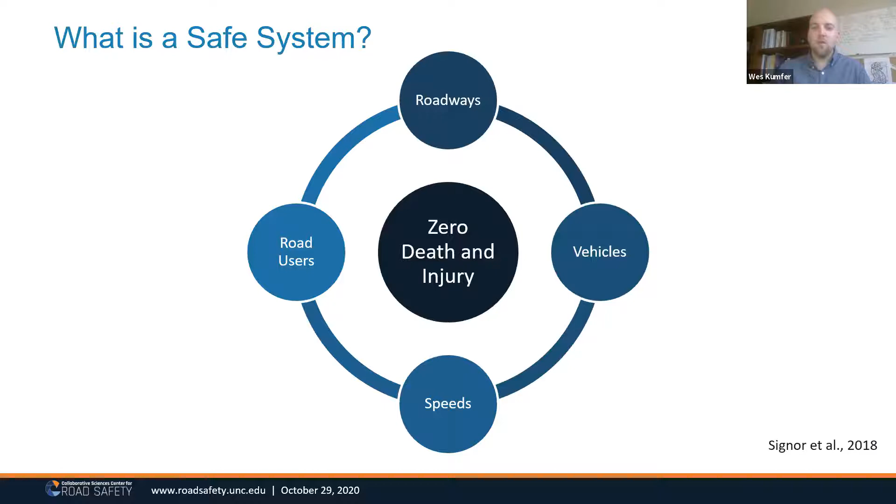As mentioned in the introduction, I am part of the Collaborative Sciences Center for Road Safety, and we are a UTC focusing on safe systems and system science.

Whenever we talk about safe systems, we talk about four key principles: adapting the structure and function of the transportation system to the complexities of human behavior, managing the kinetic energy transferred among road users, treating road user safety as the foundation of all system interventions, and fostering the creation of a shared vision and coordinated action.

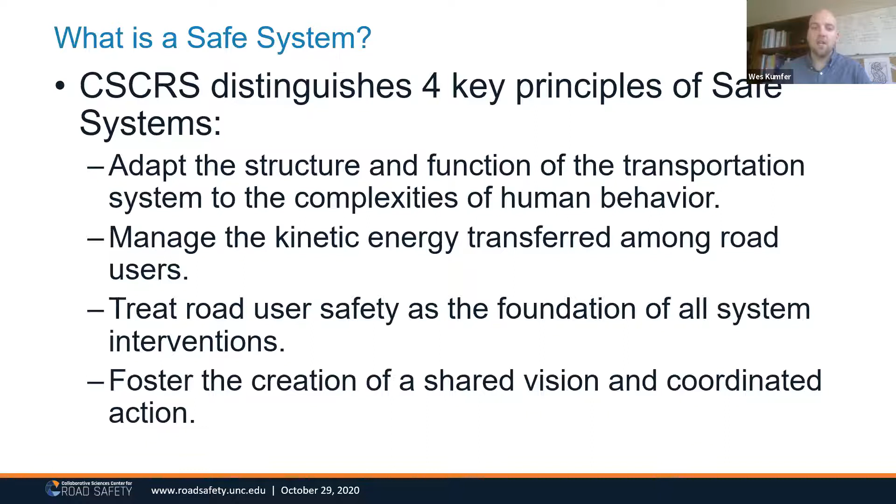Now that we understand the principles behind safe systems and how it got to the US from things other countries are doing, I think it's important to affirm why we need to do this. Why do we need a different paradigm in the United States?

If we look at our fatal crash trends and fatalities from 1975 to 2018, and some other statistics I'm about to show you, I think you'll see that we have made some advances, but we're not where we should be.

In fact, within recent years we have plateaued in the number of fatalities, whereas before it had been driving down. Some of the question is, was the change we saw previously around the economic downturn and in the early 2010s entirely due to changes in travel patterns? And if so, are we actually improving things, or is that simply a matter of the denominator?

Meaning, if we're talking about deaths per vehicle miles of travel, if you take away that vehicle miles of travel or reduce it, then you might be changing what you're looking at. So this is a good question of how much we are actually improving.

I want to look at a few other things. This ITF report just came out, and it compares percent change in road deaths over the last 9 years, and road fatalities per 100,000 inhabitants in 2019. Compared to a lot of the other industrialized nations in the world, the United States is not doing as well. We have had quite an increase in fatalities over that time.

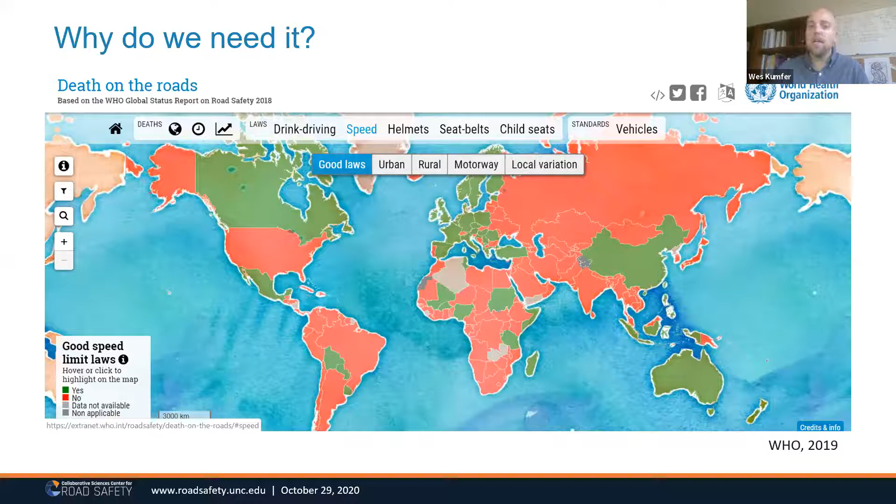Part of the reason why this might be the case is, at least if we look at how the World Health Organization compares speed limit laws and good speed laws, we don't have good speed laws here in the United States. I would go so far as to say we have a speed problem in the United States. There is a lot of speeding. We have very high speed limits, and this results in high kinetic energy on our roadway network.

Kinetic energy is extremely important to account for in a safe system, because humans have a physiological threshold for kinetic energy. If we are really trying to focus on keeping humans at the center of our transportation system, then this is the thing we really need to account for.

You've probably seen some version of this image before. This is looking at the percent likelihood of a fatal or serious injury occurring as the delta V, meaning the speed differential between colliding vehicles, increases. We see that that probability goes up.

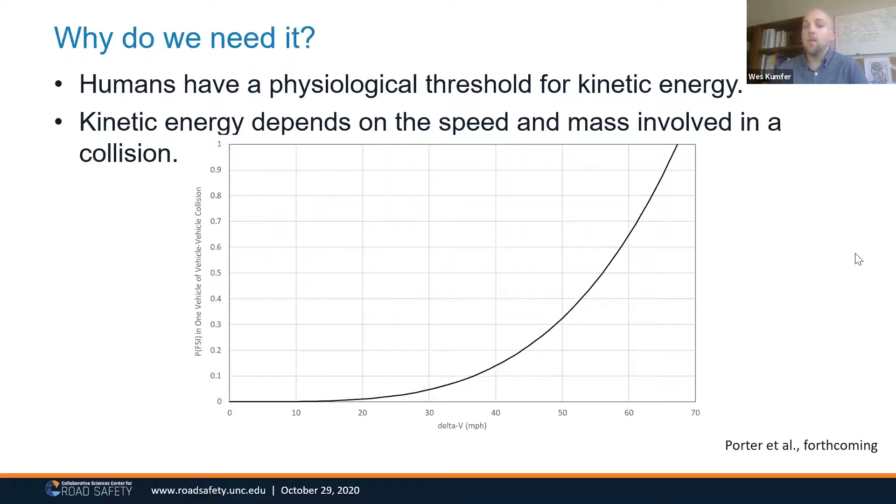And that's not a linear relationship, that is an exponential relationship, meaning that as speed increases, our likelihood of death or serious injury increases exponentially.

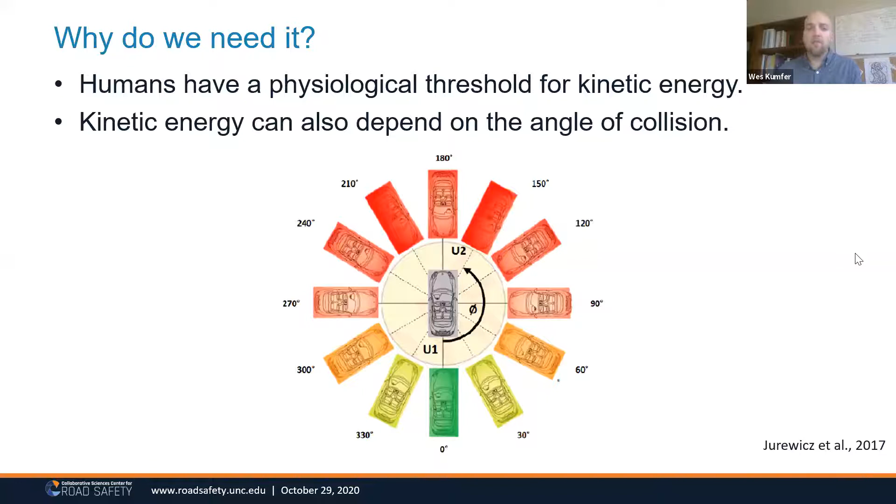I think Blair will probably talk a bit more about this figure, but one way we can mitigate the kinetic energy is through changing the angle of crashes as they occur on the roadway. What this does say is that a lot of the ways our transportation system is designed brings people into conflict, either head on or at 90-degree angles or other severe angles, which can result in pretty severe collisions.

I also want to point out that if we're trying to keep human physiology at the center, we need to bear in mind that pedestrians and bicyclists have no protection from the kinetic energy. They are not shelled in a steel cage that will diminish these crash forces.

You've probably seen an S-curve like this that shows a pedestrian's chance of fatal or severe injury and how it increases over speed limit gains. Really we see even getting past about 30 miles per hour, we're getting into like 40, almost 50% chance of a fatal or serious injury.

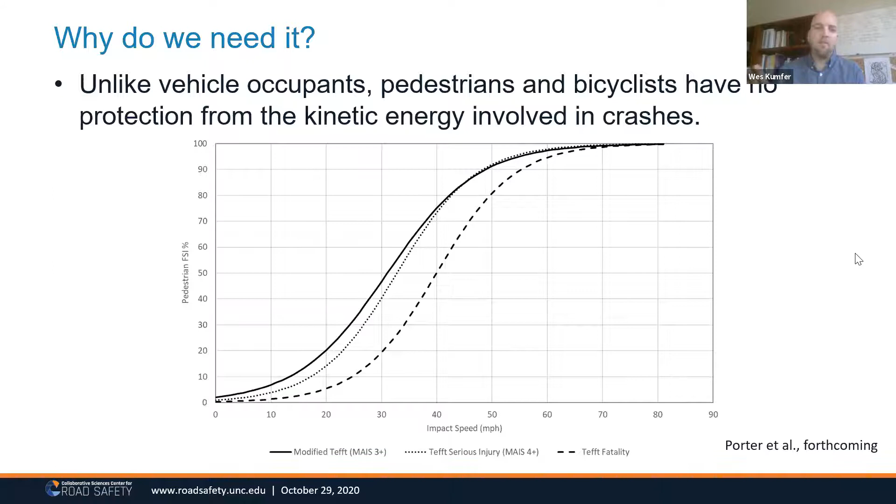It is serious, the effect of speed on those who are more exposed to crash forces. And various other studies have shown these same kinds of relationships.

These are just some tables synthesized from different references, but we see for pedestrians that if we're only talking about fatality and not necessarily serious injuries, when we get into the 30 mile per hour range, we're looking at a 25% increase in risk. For bicyclists, if you get up to 30, you've almost doubled your risk for a fatal crash.

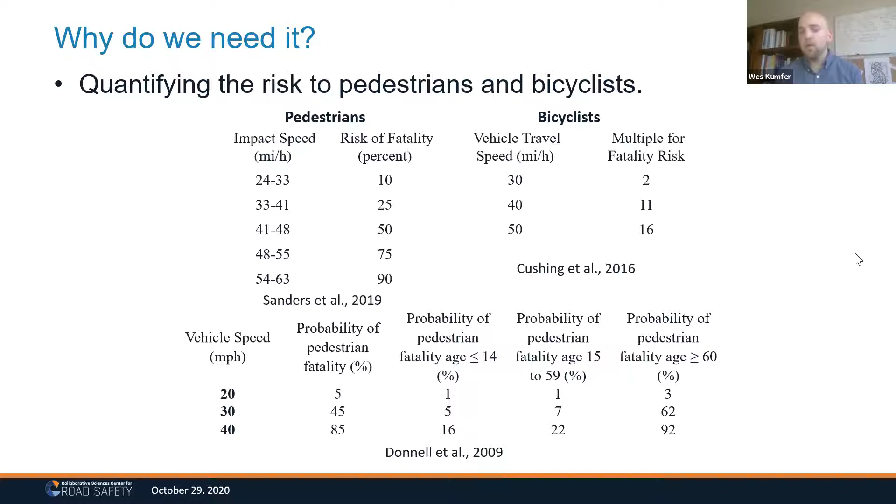And we even see that as your speed increases, it's especially dangerous for older pedestrians. Their risk of fatality also increases.

So all of that taken into consideration, I think we have issues with speed in this country, and we have many road users who are very vulnerable to those high speeds. And so that's why in a safe system, we need to consider that human physiology, and we need to consider the way that we manage kinetic energy, and we need to do this in a collaborative way.

So I'm going to move on now to our next question, and that is, how is a safe system different? Especially if we're talking about human-centered design and some of the different ways that we might try to improve safety. Some of you may be asking, well, isn't this just what we've always done? So I'm going to reference Peter Norton.

He did some work in 2015 highlighting the different paradigms of road safety. Whenever automobiles were first introduced in the United States back in the early 1900s, because they were still a novelty and new technology, and a lot of road laws were still being adapted, the onus was put on drivers to bear the responsibility for their own safety and the safety of others.

As we moved into the 20s to 60s, when more people were buying vehicles and vehicles were becoming ubiquitous, professionals realized there needed to be a bit more of a multidisciplinary approach to improving safety. And this is the genesis of the 3 E's.

And I understand that a lot of the representatives and folks calling in today on this webinar are probably one of these 3 E's. You're either an engineer, you're involved in public health or education, or you're involved in law enforcement. You might also be with emergency medical services or any of the other E's that you sometimes see combined here. But this was an attempt to have a multidisciplinary approach to safety.

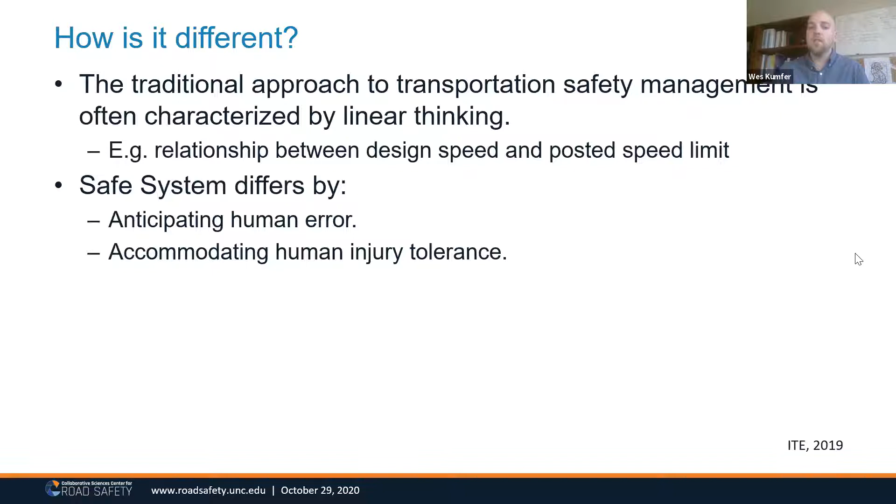But unfortunately, if you look at statistics of, say, drunk driving, there actually hasn't been a lot of gain in this field for a very long time across the United States. Some of the changes that have occurred with these trends have actually just been due to older generations aging out of the prime drinking and driving demographic. And so we are not seeing a lot of solutions by this linear thinking.

So in a safe system, what we might try to do is come at this problem from multiple approaches by doing things like separating users in space and separating users in time. Separating users in space means providing facilities for people to be separated from that dangerous kinetic energy. This means giving better sidewalks and crosswalks and control to pedestrians, and bike lanes or shared use paths for bicyclists. It also means making sure that people are separated in time by doing things like LPIs at traffic lights.

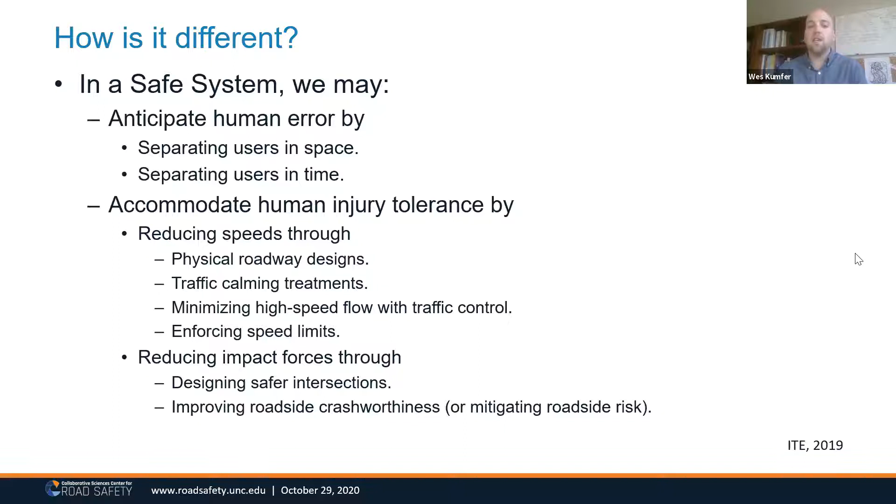But at least in Europe and several European countries, they have found ways to automate the process that is often fair and politically viable, and it removes the need for law enforcement to expend a lot of resources on enforcement of speed that can then be applied to other issues. We could also try to reduce our impact forces through designing safer intersections and improving our roadside crashworthiness.

So again, to revisit this problem of drinking and driving, there are a lot of different ways that we can approach this. One thing is to recognize that some of the issues that we're trying to tackle through the E's are born out of off-system problems. By that I mean, take drugs and driving, for example. Maybe the reason people are becoming inhibited with drugs and then getting behind the wheel is because of economic issues, because of health issues, because of the medical field that maybe is writing prescriptions for too many drugs or too strong of drugs.

Maybe there isn't good rehabilitation clinics to help addicts get off of drugs before they're getting behind the wheel. Maybe there isn't an administrative program that is establishing interlocks if we're talking about alcohol. These are off-system issues that still affect traffic safety, and that's why we still need all of the E's represented, but we need to think about how these different factors come together.

So to give you just a few more examples that can help differentiate from the traditional approach to safe systems, rather than minimizing delay and maximizing capacity, we might approach roadway design and retrofitting by managing kinetic energy and prioritizing modal affordance. One way to mitigate a lot of dangerous vehicles on the road is to have more people walking and biking and just alleviating that burden on the road.

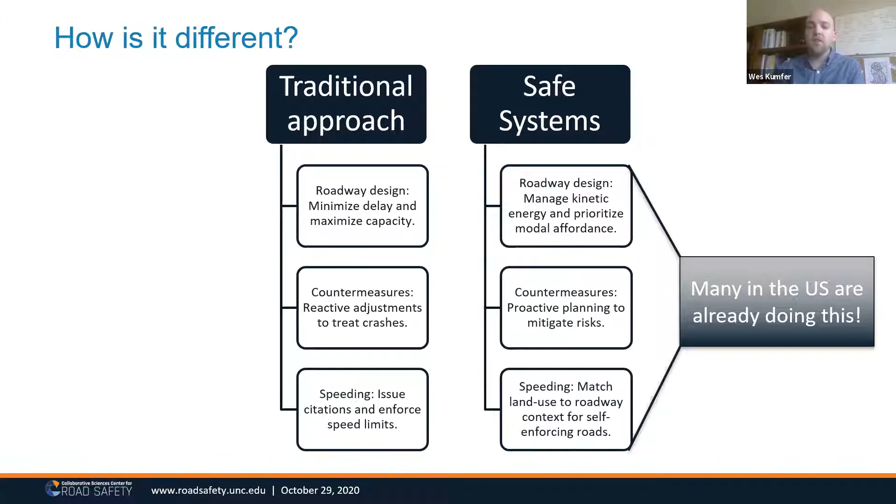I don't think these are necessarily brand new and foreign ideas to the United States. In fact, I'm hoping that John will talk about some of the things he's seeing, and Blair will share lessons learned from overseas on this. So here are some examples of what safe systems looks like in the United States.

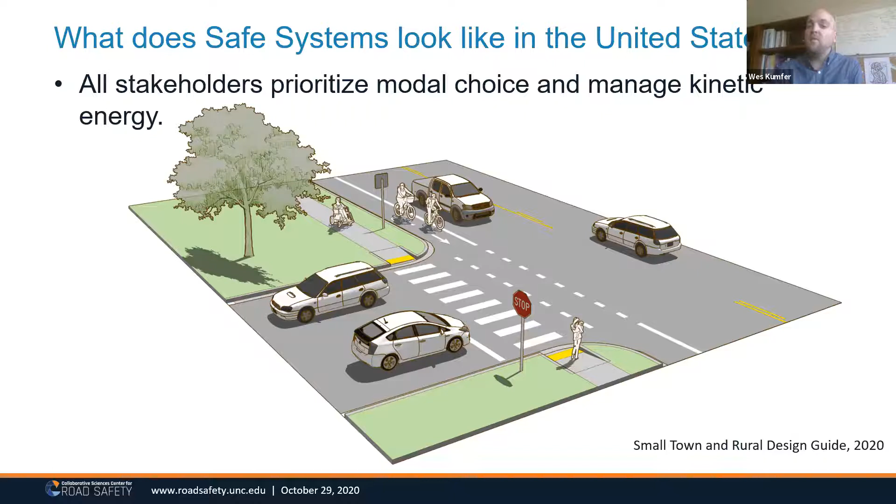If we're talking about all stakeholders prioritizing modal choice and managing kinetic energy, we're seeing things like small towns being revitalized by improving their walking and biking facilities. They become destinations where people can live active and healthy lifestyles, and it removes vehicles from the road, thereby decreasing some of that risk.

We see things like DOTs implementing safe roundabouts in rural areas. Roundabouts are wonderful because they manage speed and change the angle of collision, so your kinetic energy is reduced. We also see things like gateway treatments and self-enforcing designs to limit speed entering into towns.

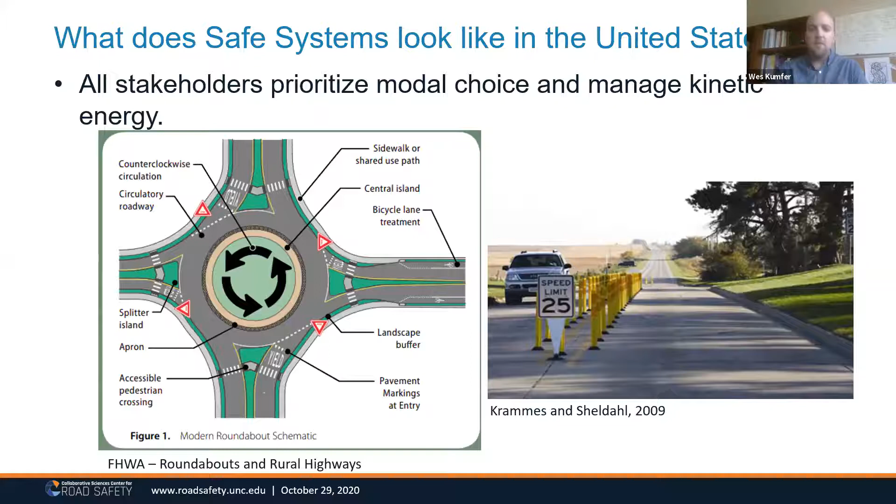This image on the right shows a gateway treatment. Not only will this help deter some head-on collisions, but it also creates visual friction that can encourage drivers to naturally slow down.

We also see a lot of implementation of complete streets policies, where we're trying to marry land use to roadway design and actually improve people's walkability and bikeability, thereby increasing safety. If you provide good facilities for people to get around other than by car, you can limit some of the risks that come from a heavily motorized system.

One thing I've been seeing here in North Carolina is law enforcement leveraging their substantial knowledge on traffic safety issues. Just as Lauren pointed out earlier, law enforcement officers are the ones responding to crashes, writing those reports, and observing behaviors.

So one way we might continue to leverage the relationship between law enforcement and engineers is to tap into that behavioral understanding, using law enforcement to say, 'We've seen a lot of safety problems at this particular intersection or location. We've seen a lot of speeding, a lot of rear end collisions here. Why don't you treat that, Public Works? Why don't you use city funds, instead of just continuing to write tickets, to implement a design that will mitigate those behaviors?' That can cause the traveling public to respond to that change, and we can then redirect those law enforcement resources elsewhere.

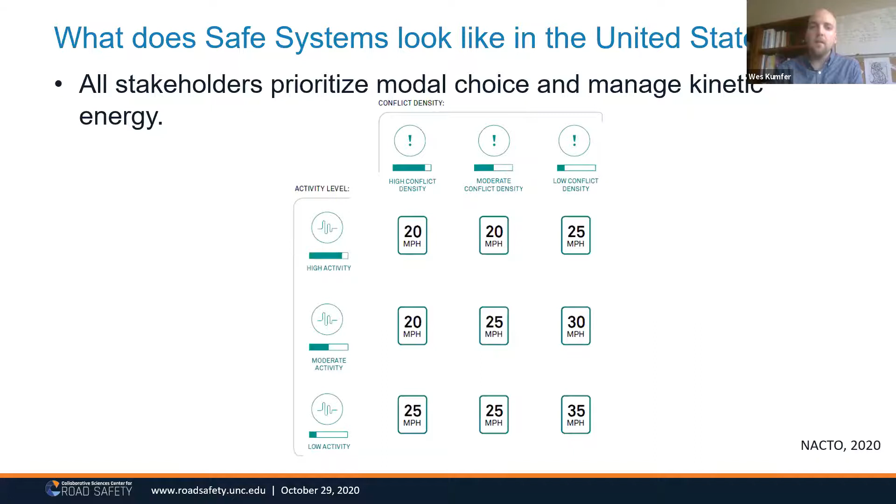I also wanted to point out that a recent guide came from NACTO, their City Limits guide, which recognized that when we have high conflict potential and high density, we need very low speed limits to manage that kinetic energy.

A safe system in the United States might also look like a breakdown of silos. As Brian pointed out, I've been involved in the Road to Zero Coalition. We recently launched a new working group related to equity in transportation, where we're tackling some big issues and legacy issues. There are many people involved in the Road to Zero Coalition, from government to insurance groups, trying to tackle this problem.

We also see a number of cities joining the Vision Zero network, putting out plans for achieving zero death and injury, working towards that from an administrative level. I was poking around the Minnesota TZD website and was impressed by the sheer number of projects happening there from a multidisciplinary perspective. So I think these silos are being broken down.

Just to revisit some key points: safe systems is a human-centered traffic safety management paradigm, and we need to anticipate human error and accommodate human injury tolerance. I think a lot of places are doing safe systems practices, but some of our practices will require rethinking. Speed management is a great example of how to pursue shared responsibility. Vision Zero and Towards Zero Deaths are two functional administrative frameworks for achieving safe systems.

Lastly, I want to point out something I've been emphasizing lately: you cannot have a safe system if you do not provide safe mobility for the most vulnerable, meaning pedestrians, bicyclists, and motorcyclists. With that, Brian, I think we'll hand it over to the next speaker.

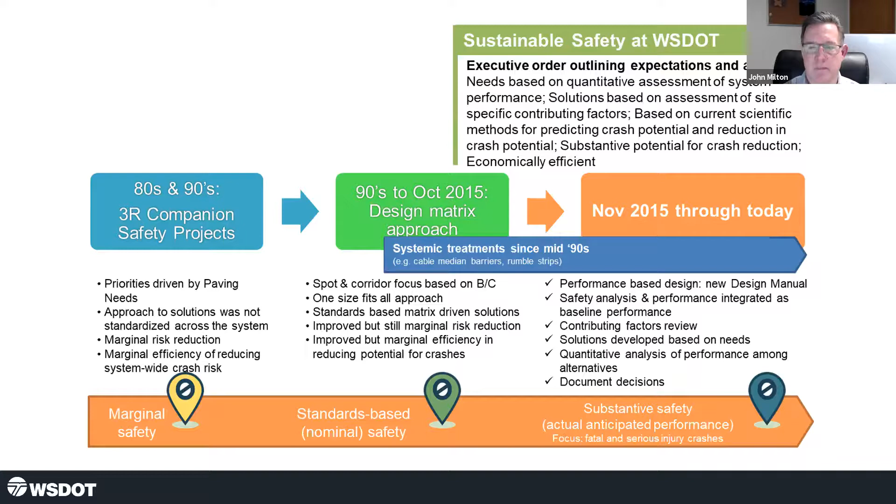Our systemic treatment—one thing you heard from us was a strong idea that we need to move to a proactive approach. If you think about it, a reactive crash reduction approach really focuses on crashes that already occurred. If they're serious and fatal injuries, it's too late. You've really got to move your thinking into the proactive sense, and our program is becoming more and more aligned that way.

In 2019, we added safe system and equity as part of our strategic highway safety plan. What we focused on in that discussion was interesting as we worked with our partners. In Washington State we have a traffic safety commission that brings all the different coalitions, as well as other state agencies—Department of Health, the State Patrol—together to have these big discussions. What we learned from those discussions is that we could do something together.

The idea that humans are fragile—we talk about that, and when you think about what that means for implementation, there are products and things you can do to the roadside, to the intersections, that will help alleviate that. We also looked at an adaptation of the hierarchy of control for safety, and I'll talk about how we're thinking about it in Washington, philosophically at least. There's also the need for multidisciplinary collaboration and the idea that users need to be responsible too. So there's a lot of discussion about blame versus responsibility, and I'll carry on with that in a moment.

This is a hierarchy of control. As Wes was pointing out, elimination is the best and most effective way for us to remove the potential for a crash—removing people from a system or removing an issue to eliminate exposure before the crash occurs is most effective. There are substitutions—we can do things on the road surface so that if somebody gets in a crash, a forgiving roadside, a forgiving intersection, helps us come up with a strategy that might lower injury severity. How we design is also important.

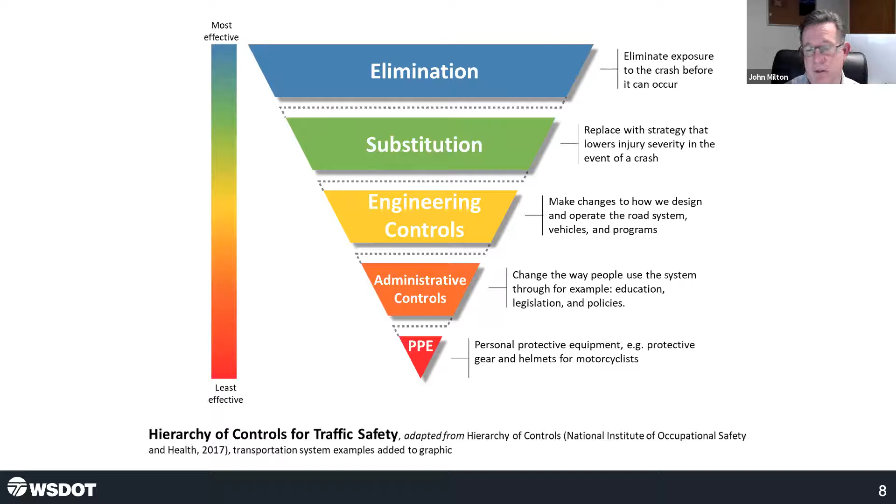There's no doubt that personal protective equipment will reduce injuries. The question is, is it the first approach? In the blame culture, we often hear, when we talk to or see in the media, that personal protective equipment wasn't used—a helmet wasn't worn, clothes were dark. That's not where we should go with this if we're trying to reduce fatal and serious crashes. We need to eliminate the potential for it, not rely on personal protective equipment to do the job for us.

So it was a cultural shift for us as well.

Many of you have seen the chart on the left-hand side, and I get a little concerned about how this is carried out in terms of what it means. It says here that about 93%, 95% I've heard in different sources, is related to the human. The fact that there are errors or behaviors related to the driver doesn't mean we should walk away from that as a responsibility for us as infrastructure owners to do something about it.

We need to think not in terms of we shouldn't have to do this sort of project because there was so much drinking and driving or running off the road due to speed. Rather, we should think about what we can do from an infrastructure side to address those issues.

We do it all the time, we just don't think about it, right? Why do we put out median barriers? Why do we put edge line striping, rumble strips, or roadside barriers? It's to reduce the fatalities and serious injuries that we see independent of the reason somebody might run off the road. That's the idea of a forgiving infrastructure.

Now, I hope in the future that as we talk about this slide on the left-hand side, the driver issues, we think about it differently. We don't want to blame, but we do need road users to share the responsibility for safety, to understand the impacts of what they do, to understand how they are seen or not seen on the road surface, and to accommodate for that.

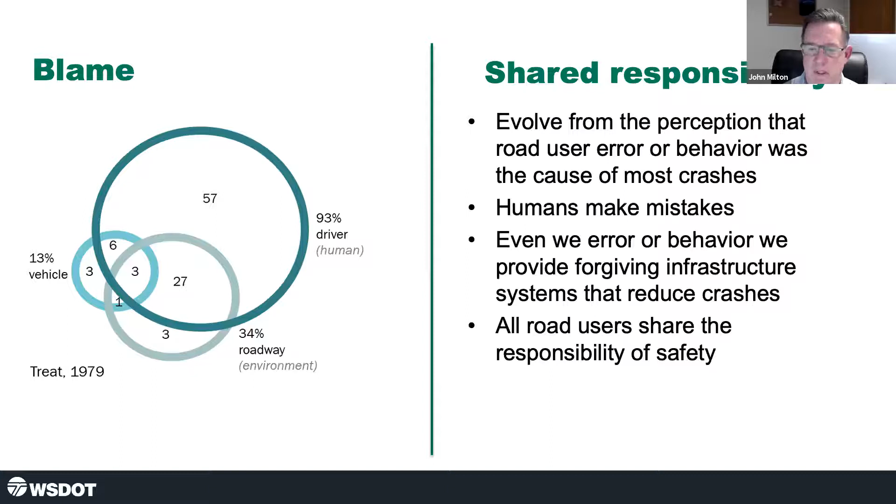We went through a whole large discussion in terms of WSDOT improving its practices to move to the safe system. Quantifying safety performance is incredibly important for us to be able to really target those fatal and serious crashes and to expend our money in the most effective way. To do that, you have to evaluate, analyze, and diagnose the issues you're seeing. It can't be all or nothing - we don't have the funds for that. It can't be nothing, because then nothing would get done.

The other thing that has to occur is that from planning to design to operations, the processes need to be aligned. We're working really hard on that. Performance-driven decisions need to occur across the system. If planning is not done in a way that design can incorporate, such that the design can be operated to reduce fatal and serious crashes, we're going to have challenges.

So think about the old design standard that required us to design for 10 miles above the operating speed of the system - that only leads to greater speed in the system. So we need to think about that.

Incorporating context - not all systems basically operate the same way based solely on functional class. We need to think in terms of things in the multimodal sense. All road users are created equal in terms of their potential for fatal and serious injuries, as much as we should protect vulnerable road users because they are vulnerable and susceptible to injury in a way that those in a vehicle may not be. Consistency in the way we carry out and look at things is also very important.

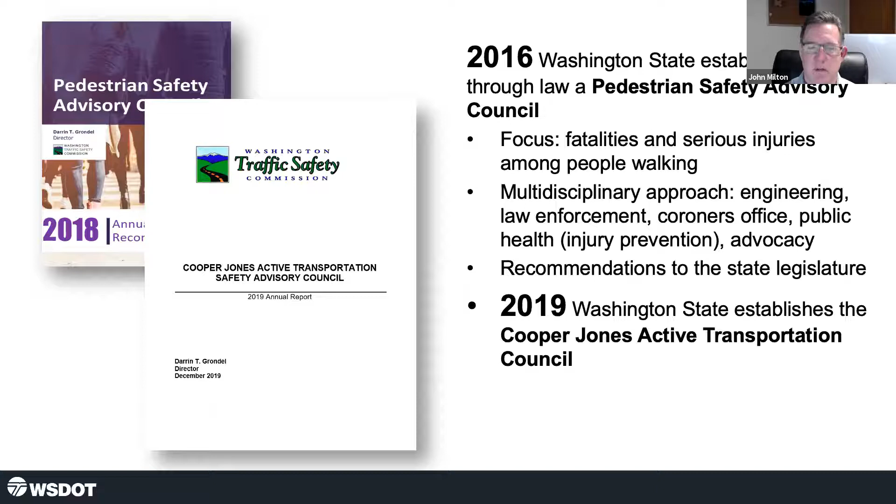Putting in access controls is an idea of restrictiveness. Forgiveness is putting in systems so that should events occur, they're reduced in terms of severity, and to let people understand what they're doing. So we've heard a lot, and we're designing as much as we can self-enforcing types of systems. Right now we're doing research, for instance, on why speeding episodes are occurring on our facilities using the naturalistic driving study. Next slide.

We've also begun to look at speed in terms of injury minimization. Speed management in the US is often addressing speed based on floating car 85th percentile, but what we're really trying to get to is target speed. We're looking at category-based target speed, and we're making a recommendation that speed setting be within 5 miles per hour of the operating speed, going below the 85th percentile. Where systems are operating, we use iterative speed management to bring the system down in 5-mile increments. Again, the idea is to remove the potential for serious and fatality type injuries.

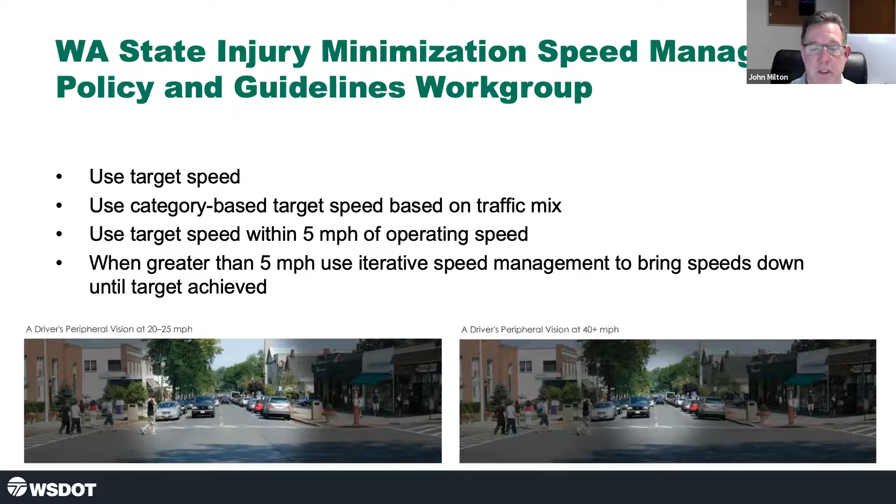For WSDOT, Sustainable Safety, Vision Zero, and Safe Systems all offer the opportunity to strengthen the road to zero fatalities and serious injuries. We need to look at things in terms of data-driven and science-based decisions, based on information, not emotion. We need to set up systems to do great diagnostics and evaluation to be most effective, and we need the people, processes, and tools within our agency to do that. It takes time. This is a marathon, not a sprint, but take a look at what you have — you probably already have good components of a safe system. I'm sure, knowing Minnesota's safety record, you're well along the path.

Moving forward, WSDOT is looking at a complete change in our implementation plan. We've moved from crash prevention to systemic type improvements. In the past we were about 30% proactive, 70% reactive. We're now 70% proactive in how we fund our projects, funding where we have the greatest return on investment. In Washington, we also pass through about 70% of our HSIP funds to local agencies, with about 30% maintained by the state. The idea is to get the money to where the crashes are occurring, being proactive in doing so.

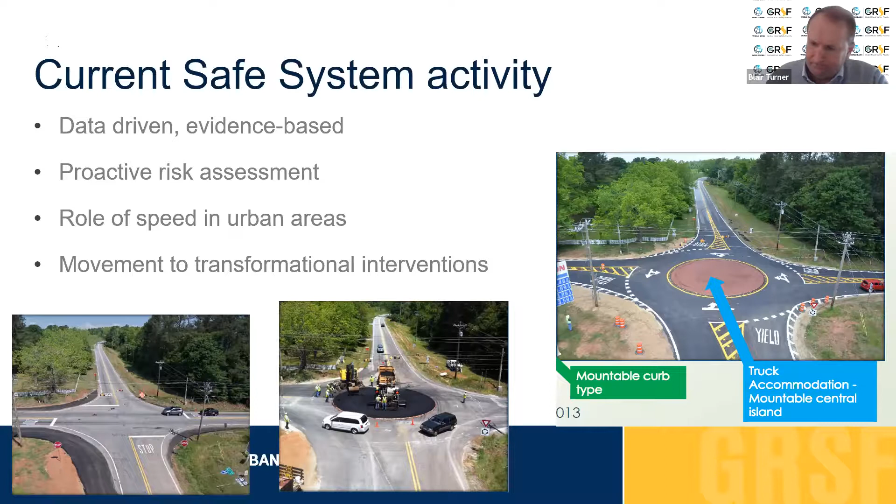So just very quickly, some of the things that need to change, and this is still the case in Australia. We had, like I said, 15 years of safe system. We spoke about it and debated about it for the first 10 years, and a lot of it was really theoretical, trying to define things and trying to understand. It's only really in the last 3 or 4 years we've really got to grips with what needs to be done.

And I think from my experience there, a large part of this is really trying to quantify what we do. One of those areas in which we can quantify activity is really around this cultural shift. So you can ask yourself, in your organization, in your day-to-day job, where are you on different elements of the safe system approach?

Put in place a plan to understand where you are and what you need to do next to increase awareness amongst your colleagues on this issue. So the cultural shift is needed. We need to understand these concepts and start to change our activity based on them. But we can map that change through these sorts of reflections on what we're doing.

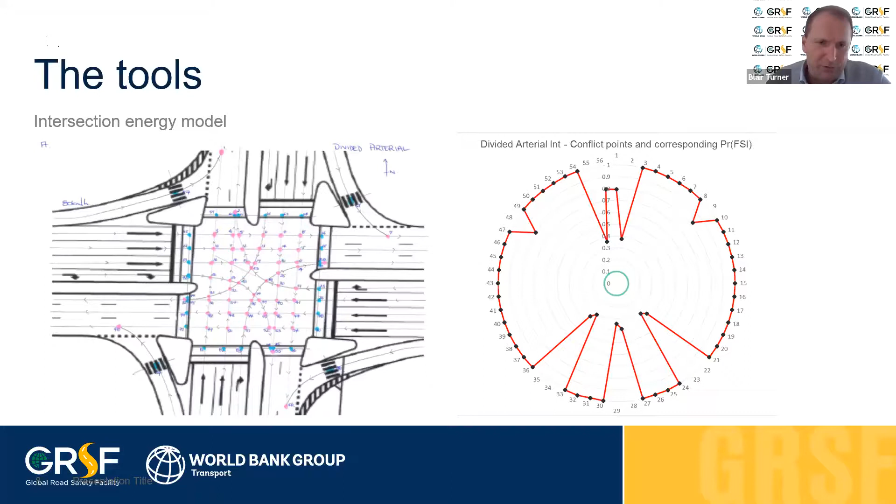We then did the same calculation if this configuration was a roundabout, with the same speed environment—what would the chance of death and serious injury be, again based on that impact speed and angle of impact?

You can see here the red doesn't really exceed a 10% chance of death or serious injury in many cases. So these sorts of tools are really powerful to, one, understand the basic concepts of safe system design, but two, also as communication tools to show decision makers why we need to move towards things like roundabouts and other transformational road safety improvements.

A really key point, these tools to me were the major game changer for us in Australia. As engineers, we use these tools commonly in our daily practice, and it's something we're used to using. We really struggle with theoretical guidelines that we're having to interpret ourselves. So a major recommendation is to start developing these tools.

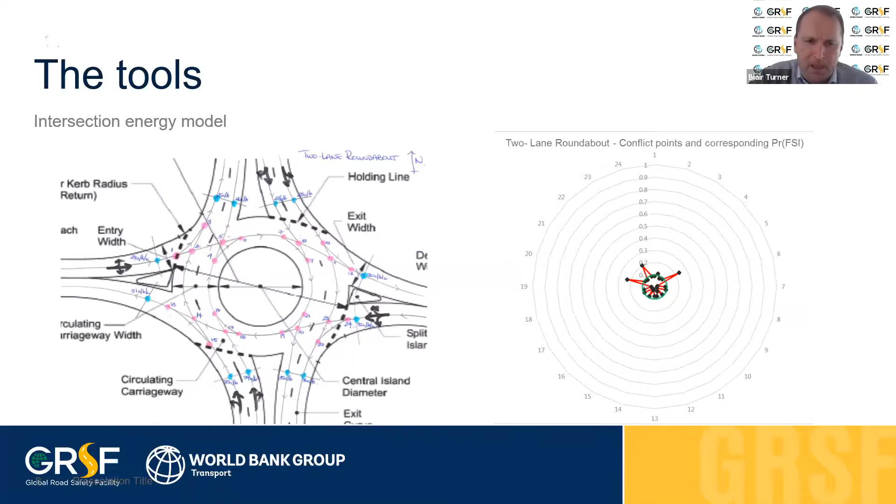Lastly, and probably of most interest, given shortage of time, I'll just touch on this issue of innovation. We recognise that we need to do more of these transformational treatments. Obviously, large-scale networks - in Australia, we have thousands and thousands of kilometres of low-volume roads, so we needed to innovate and try different things away from our motorway networks particularly. So some of the things we're doing, we scan internationally to see what's working elsewhere. Again, all these photos are driving on the left-hand side of the road.

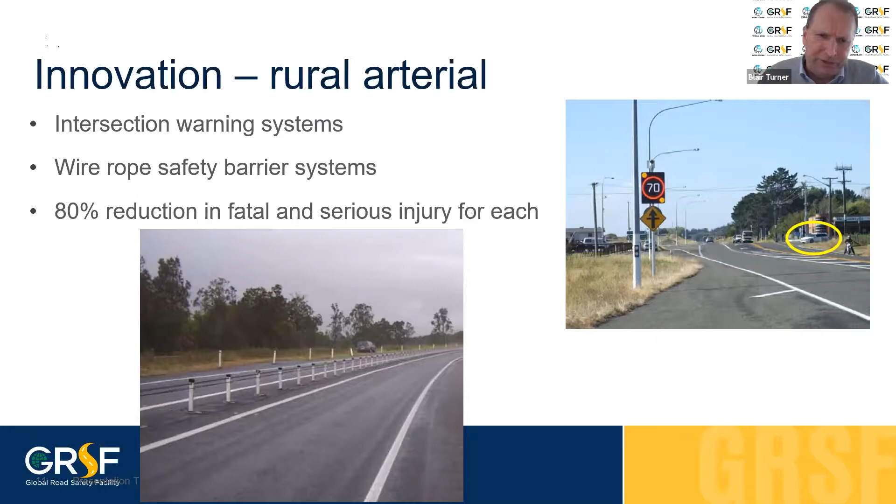Another major one for us is the left-hand slide there, wire rope barrier systems, both side of road and centre of road. This is our default position on our high volume networks. We've moved away from the thinking that a clear zone to the side of the road is best, allowing people to run off the road and recover. That just wasn't happening - we were getting massive issues of cars rolling over and people being killed. Our analysis showed that the best result was these flexible barrier systems, particularly these centre road barriers, which prevent head-on crashes occurring, but also run-off road crashes to both the left and right-hand side. So both of those interventions, about an 80% reduction in fatal and serious injuries from each.

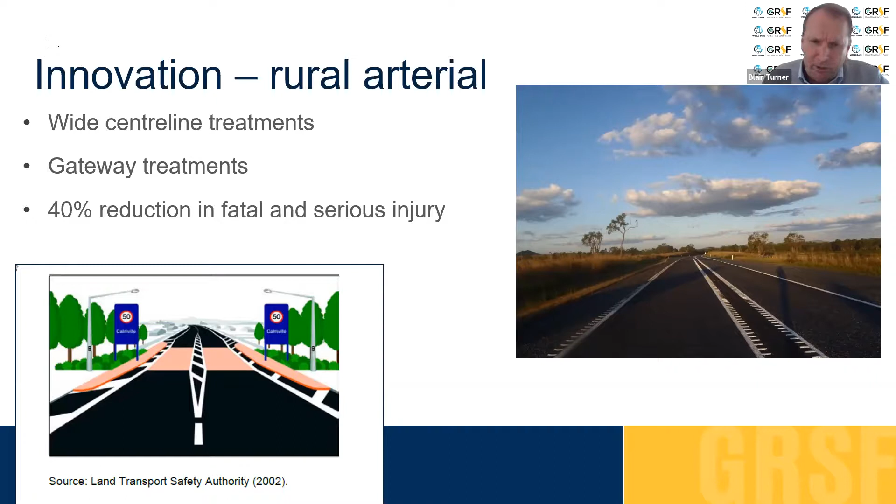Urban arterials, we're moving what we traditionally would do on our local roads onto our urban arterials. This really goes back to those discussions from the earlier presentations about survivable speeds. In terms of striking pedestrians, you need an environment of about 20 miles per hour.

So in those areas where there's high pedestrian volumes, we're putting in place raised pedestrian crossings. At our intersections, we're putting in raised platforms on the approach. They're highly visible at these high risk locations, the public understands that, and they comply with those speeds, both because they see the risk and because of this platform in place. So we're doing a lot more of this, getting safety benefits from these interventions, starting at our highest risk locations first.

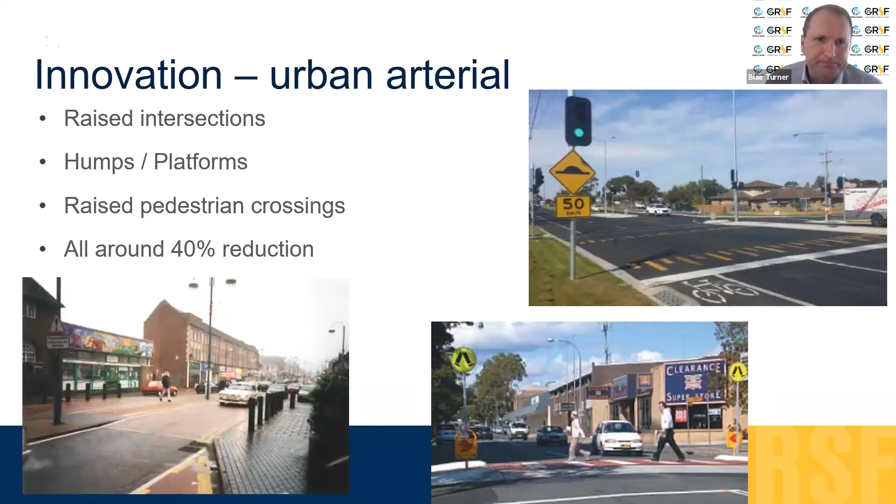Urban gateways, top right image there - going from perhaps more of an arterial road into a highly pedestrianised area. That's a 50 km/h, so 30 mph zone, as shown in the top slide.

Variable speed limits, bottom left slide there. So as it gets to a busy period of the day, we lower the speed. In off-peak periods, we increase it back to the normal speed.

Bottom right, a bit hard to tell what this one is, but we have a big issue in Australia with a lot of intoxicated pedestrians in some of our cities in the evenings. So what we're doing more and more now is for the signals, during off-peak periods when there aren't many cars, we turn the lights to red. When the car approaches, the signals will change to green. But the effect is that the car has been slowed right down, so that when that drunk pedestrian does step out onto the road, if a collision does occur, that'll result in serious bruising at low speed, but not death or serious injury. So again, some good benefits from that.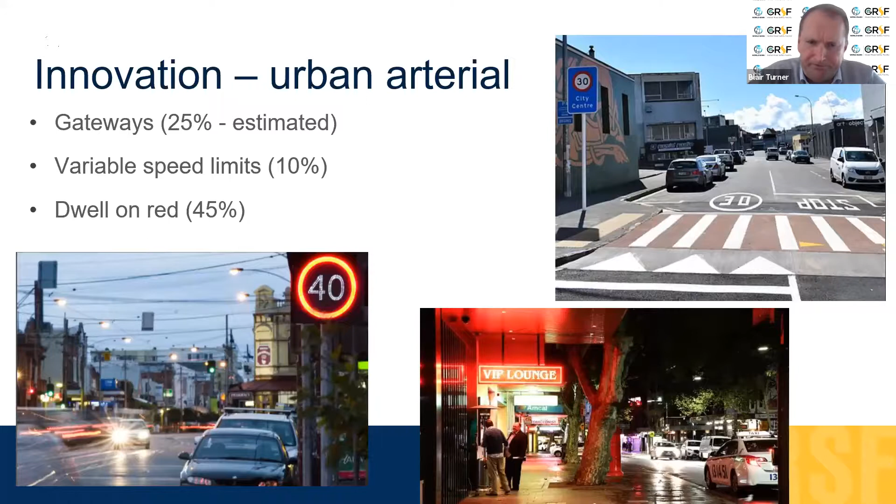So in summary, I'd like to make some key points. Firstly, some great progress being made in the US. It's not all negative, it's about building on what we're doing, taking those good things and doing more of them. We do need to move away from the theory - we need to understand that theory, but start acting.

To my mind, a lot of those issues I touched on were really about the need to measure. Set yourself some solid targets, break the problem down into elements so that we can track performance, we can allocate responsibility. We can even measure, qualitatively or quantitatively, this cultural shift, both at the strategic level - your understanding of the safe system principles - but particularly at project level. That was the game changer for us.

And lastly, innovation is needed. The guides in Australia take about 10, 15 years for us to change with new knowledge, and new knowledge is emerging every single day. So in a very controlled way - it can't be a random trial of a new technology or treatment - but in a structured way, following an evidence-based approach, we do need to innovate, try new things, and then scale up when we see the success of those interventions. So I would certainly encourage you to do that, but obviously in a coordinated way in discussion with state authorities.

So I'd like to finish it there and pass back for Q&A. Thank you.